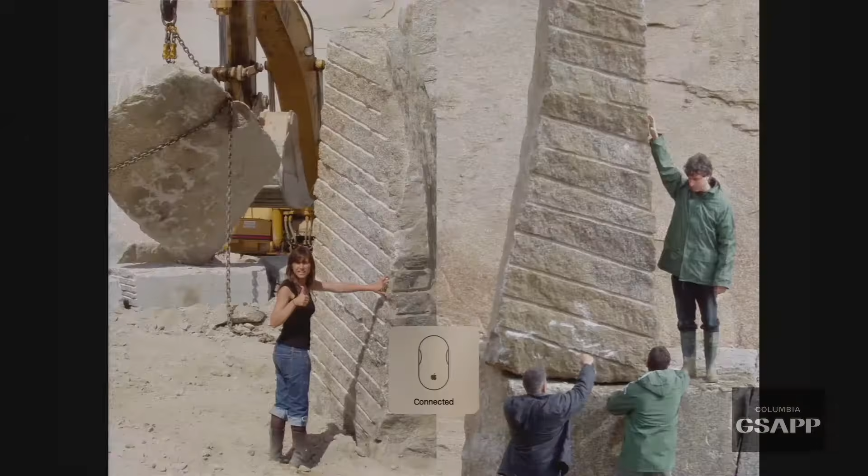Now that we know we've taken students out of their desks, we have to make it worth it, so we are under pressure here. Now, it's a real pleasure — Amale did an amazing introduction. Thank you very much, we almost want to use it maybe for a book, you describe us even better than we see ourselves. But yes, we are a group of architects.

We see ourselves with an engineering background and artistic vocation. Our work ranges across scales, technologies, programs, materialities, and geographies. We like the complexity and diversity that being an architect can involve, and we like engaging in new projects that we have never tackled before.

We started as local architects in Spain, working in some of its historic cities. So we learned how to work with history, how to interpret it, how to reimagine it, or be inspired creatively by history. And we became builders very early on in our practice, almost by necessity, because we realized that if we wanted to build some of the non-conventional ideas we had, we needed to develop the expertise and the tools, and take responsibility for changing some of the rules of the game.

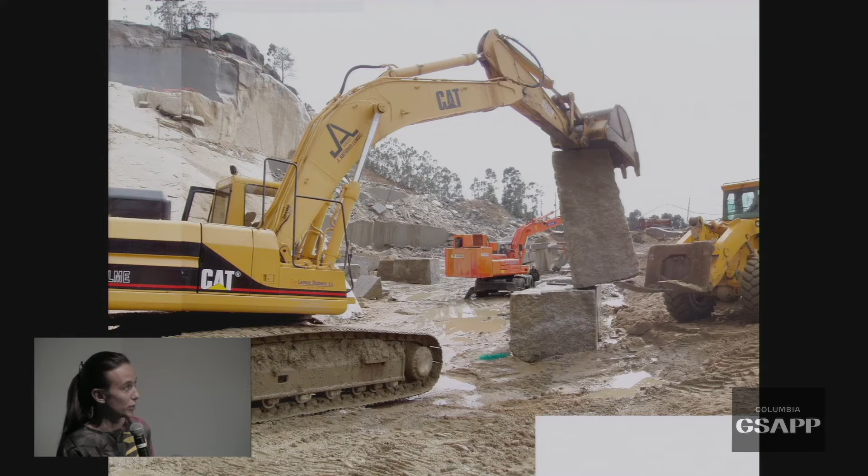But then we had to devise a plan to convince the owner of the quarry to let us use some of the space to do tests on the ground, to make sure that what we were imagining was really possible and made sense.

So these are some of the tests we were doing. First, we were just going to build part of the wall that we had designed.

I think this introduction shows our beginnings as designers. As you can see, this is not conventional design, but this was what we started to use as our primary method of understanding architecture.

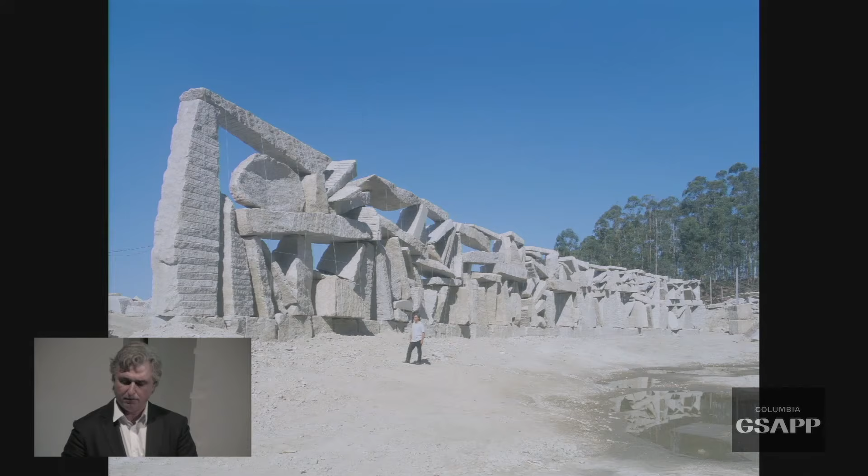Go deep into the roots of it, work with the systems, the processes, the tools, and be able to prototype it, almost fabricate it. And this includes doing it with landscape.

This was the full-scale model, or one-to-one model, the built structure that we did for Santiago de Compostela. We had to rebuild it again.

But this reaction, unearthing the substrate of architecture from its place, is something that has accompanied us since the beginning — understanding architecture as the conjunction of all these infrastructural, poetical, and technological links.

And we realized from these first works that the time that went into the idea of how to build this building and how to make this wall happen was a small fraction compared to all the time that involved really developing the expertise, learning about the material, and convincing the different agents in the process to make it happen, and to run the tests at the quarry to prove this was possible.

Here we learned the main essence of architecture: the weight, the masses, how to deal with gravity, all the tectonical encounters, how light reacts, all the forces and energies embedded into architecture. We also learned how these things could react with people in different conditions, and how this became part of the insertion of architecture into a culture or a city.

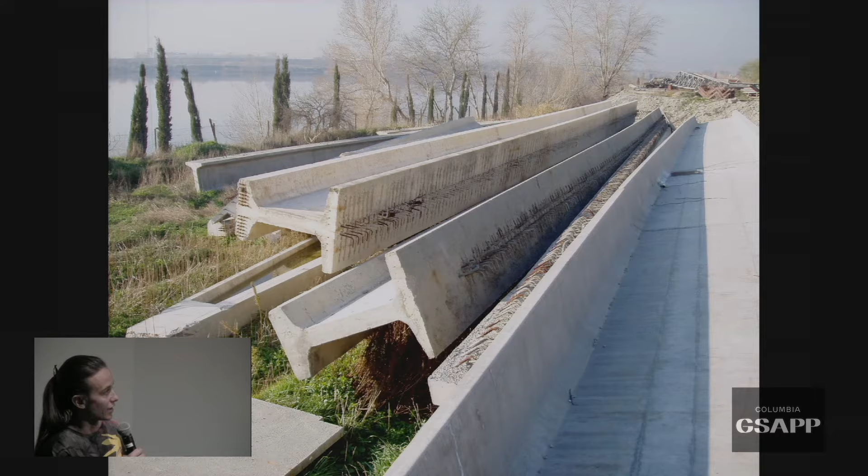After these first works, where we started building by necessity, we became builders by heart. We realized that the house has become our field of experimentation—a scale that has allowed us to investigate certain ideas about architecture that we can then take to other levels.

So the way we are going to structure this lecture is departing from three different houses that we have built, and how these ideas have been taken to other buildings or scales. We'll start with the Hemeroscopium House.

Even in a very industrialized process, there's a waste, there's a raw material, there are some primary elements that could be reinterpreted or reused.

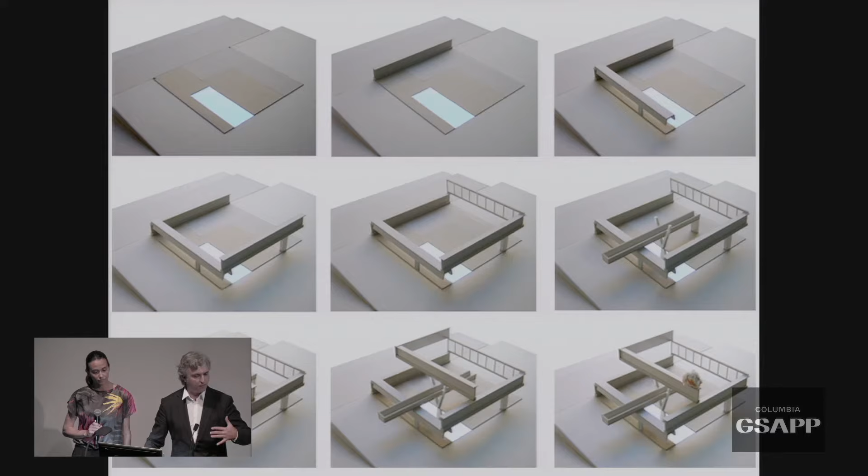Our approach to the pre-stressed concrete technology was a fascination with all these internal guts that contained the tensions that were going to be expressed and put into performance in a structure. Ultimately, they had a shape given by efficiency—a very synthetic, almost soulless form—that we thought could be perfectly put into an equilibrium system, and therefore create a narrative based on how it was built.

So all the strength of this house was understanding that the spaces were the consequence of the logic of how it was made, how it was engineered, how it was assembled, how it was transported.

All these helixes of transmission, of connections, of connectivity in that spiral, ended in that stone as the expression and culmination of that gravitatorial itinerary—also the expression of the architectonical and gravitatorial nature of the house.

All this was scripted to be almost automated through a clear logic of heavy lifting prefabrication. And this...

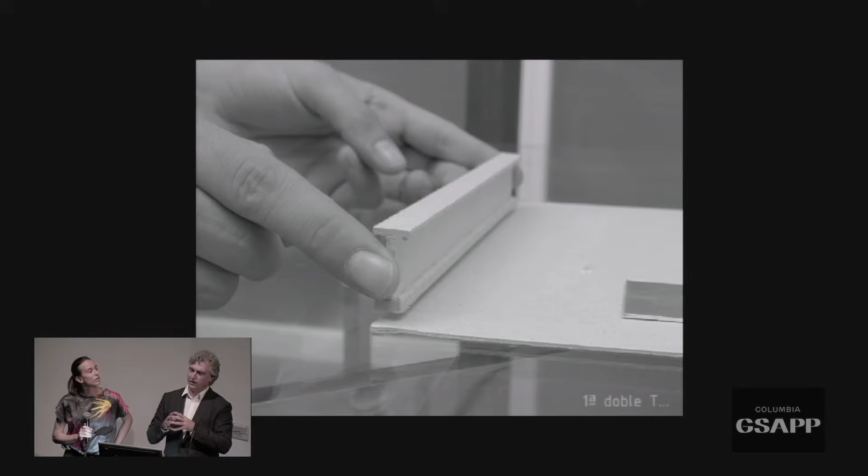This video expresses how our thoughts in the studio matched the way things were built—how some of the very abstract intellectual games we induce when designing have to somehow match the constructability of the project, giving it an inherent beauty in how it's built and constructed.

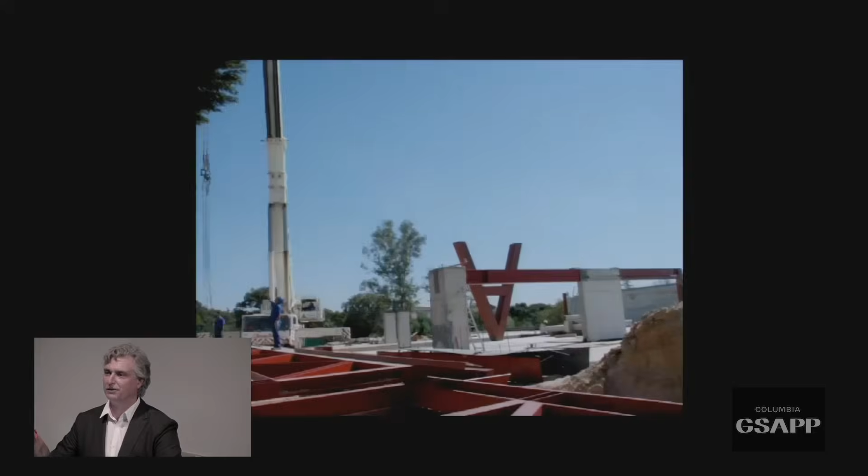Actually, we were the builders of this house. We were the contractors. I know this is unprecedented in the United States, but we built as builders, as general contractors, all our early works, and that gave us the knowledge and sensibility of understanding that the mysteries of architecture are related to its tectonics, its fabrication, its assembly processes.

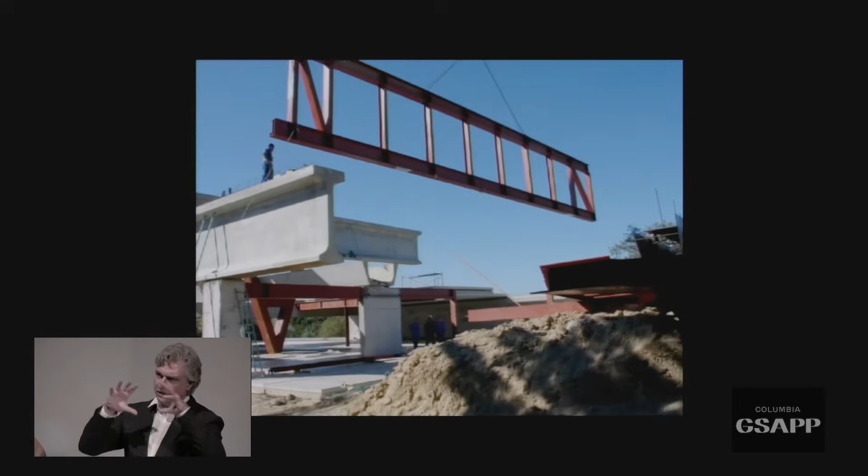I think this is something architecture is starting to lose, because our profession is being cut into disciplinary parcels that do not touch each other. And it's a pity, because we understand a holistic performance of the architect over all the stages of the process.

I think even being able to intercede as master builders in an old-fashioned way gives the architecture a completely different touch and interpretation that we are happy to maintain.

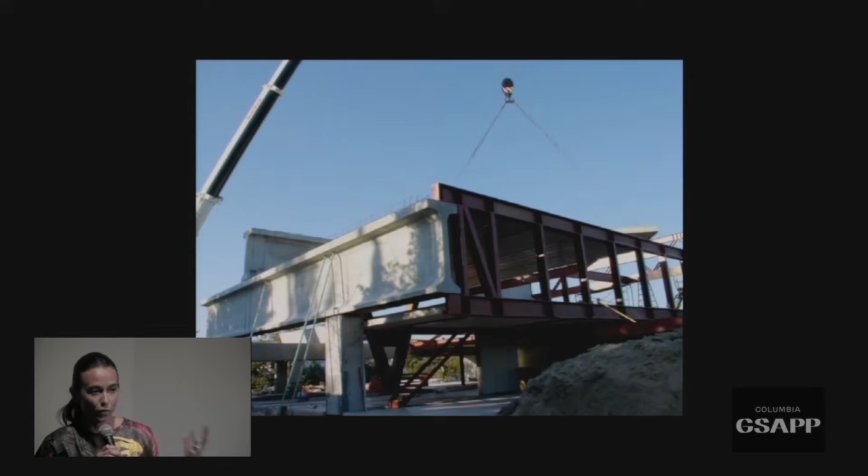I think this video also reflects well this parallel situation between the model and the construction—how we understand and use the model as a way of thinking, as a way of designing, versus a way of representing and maybe selling the work to others.

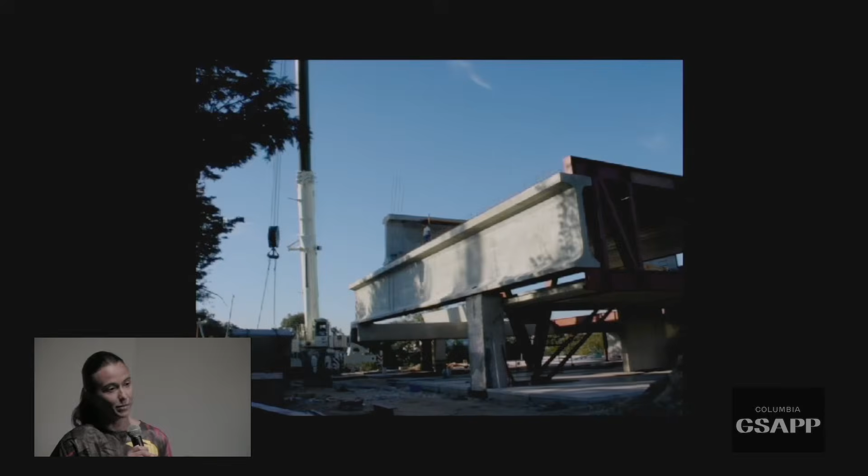For us it's very instrumental, because while we are designing, we are many times thinking using technologies already embedded in the design that we need to figure out how they are going to come together. So that part of the construction comes very early on in the process.

And by doing this nude expression of the structure, or revealing how a building has been made, we developed an architectonical language, or at least an interest, based on these almost similarities between all these previous moments of the structure being built, of the gravitas of the house.

So the house, when the structure is completed, already reveals the order of the space, the scale of the space, the nature of all the living areas that are going to happen. Then it's a question of adding the rest of the elements to make it thermally enclosed and to provide the functionality of the house.

So what we learned about this house was that we could achieve spatial goals of lightness, transparency, continuity, how to relate with the horizon and the surrounding, even with a very synthesized, almost artificial system of beams, things that are unrelated to the environment. These pieces are all designed according to their mechanical efficiency.

But this reinterpretation gave us some clues about the spatiality associated with how to put this in a particular balance, how to excite the gravitational actions by tracing all those limits in an open way. As you can see, all these reactions from the vibrant line of the landscape clash against the linearity of those architectonic traces.

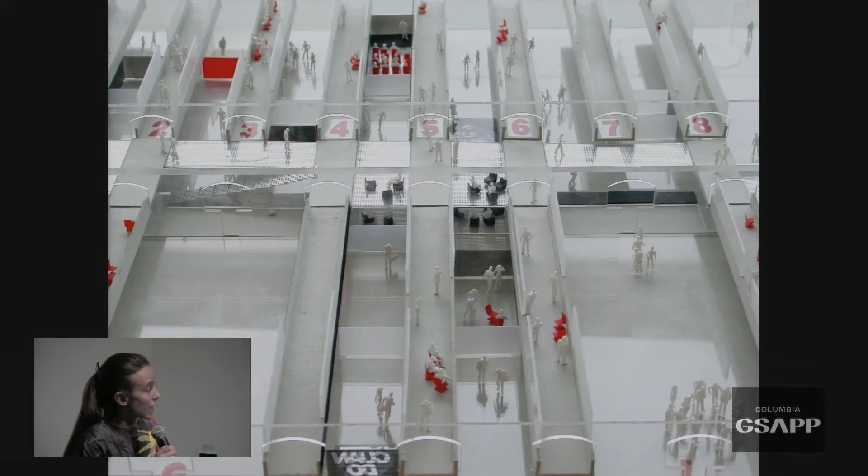We tried to bring this to a very sensible context, protected buildings, beautiful engineered buildings from the beginning of the 20th century, and figure out how to insert a new structure that would dance with the old structure and create another space, while allowing both times to be legible at the same time. That idea led us to propose the insertion of these bridges of activities, answering the competition's question of how to create a second level in the warehouses, while enabling the old and the new to live together and distinguish themselves.

So all the challenge in this building was to insert those beams through the eyes of the building. Again, a technological challenge that became the performance and the soul of the new space, by almost invading slightly. This is also a code issue. We convinced the authorities that this was not part of the building, so we inserted it naturally through the windows, and got a second level.

So this is the kind of fascination that technology offers an architect, the way of threading through technology some of the main aspects of a building—like, do not insert 25-meter beams through a window. In this case, this was the way the building ultimately existed.

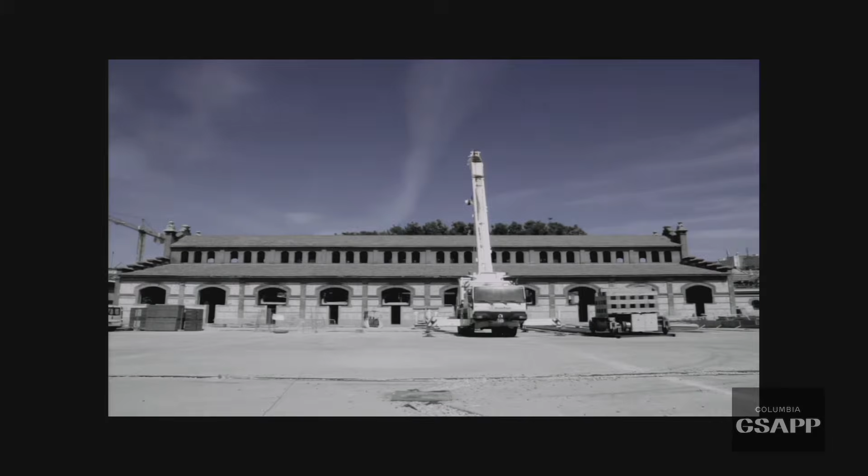And actually what seems very smooth and easy was the part that obviously took the most time to figure out, design, engineer, and orchestrate—especially because everybody was thinking about precast concrete and big beams introduced through the windows, and they were anticipating some kind of catastrophe.

But you can see how the insertion of these elements into the space, like we saw in the Hemeroscopium house, because of their span and the way they are supported on the windows without really revealing clearly how they are supported, they are very heavy but seem quite light in the space.

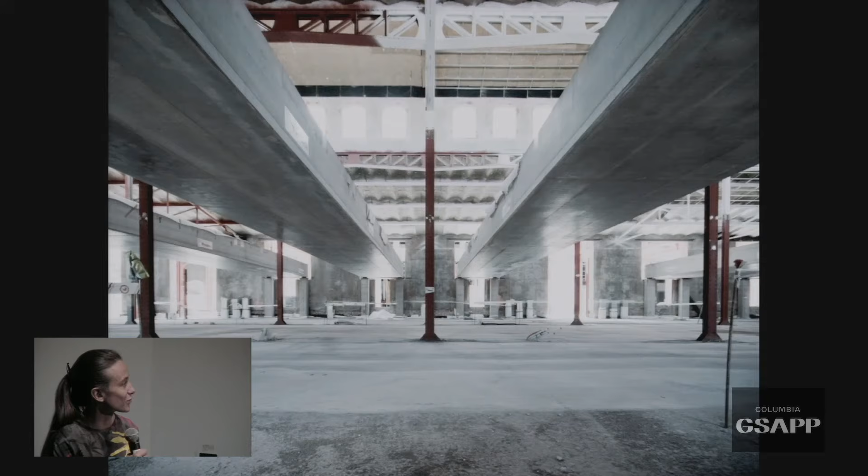So all this effort, these challenges to the logic of the building and the logic of construction, ultimately serve a goal, and the goal is very architectonic: the cohabitation and the friction between these two structures, this kind of dissonance, the fragility of that thin column with the presence of this lintel, or the horizontal order of the basilical organization of that warehouse with the transversal connection of these bridges.

I think these encounters, these dissonances, these intromissions of structure into another structure were the argument of this building, and ultimately the beauty of the space.

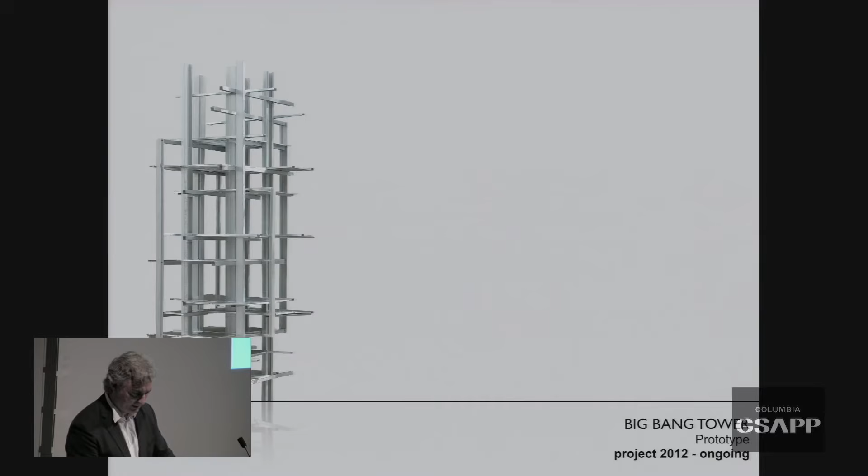This continues on and on, and we've been pursuing the idea of these systems of construction to build at greater scales, from a house to the transformation of a historical building to a high-rise. We believe this has enormous potential that we're designing, first intellectually and conceptually, and ultimately searching for the built opportunity that culminates this itinerary.

This building, what we presented in Chicago, is called the Big Bang. It's a challenge to the American tower, the tower as a core and shell system. What we presented here is the explosion, what we call the Big Bang, the explosion of the gravitas of the core.

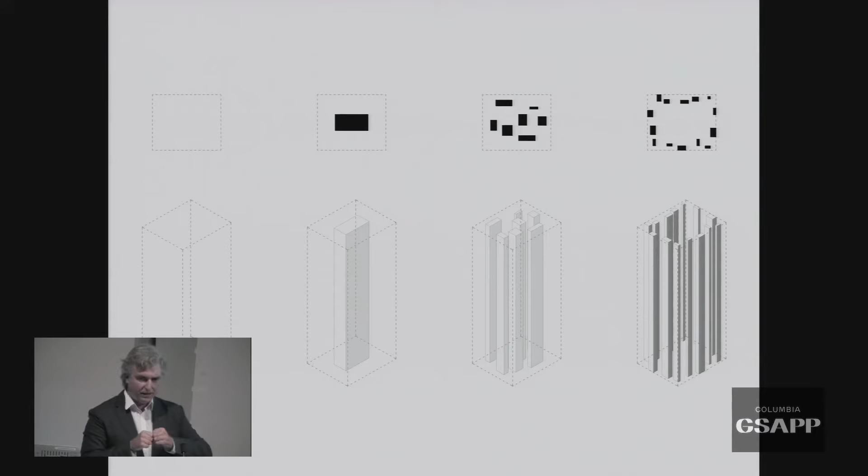The core is where all the mass is concentrated to liberate the envelope. This is the classical modern tower. We understood this in a contemporary way, attending to the logic of fabrication offsite, so this could be eccentric to the geometry of the center and adopt several forms through this kind of expansion of all the pieces.

So this is the standard core in any tower, and these are different variants of the same mass dispersed more efficiently, creating a new spatial condition.

This is what we wanted to explore in the Chicago Tribune tower, as the culmination of a research project that has come through Ensemble Studio, back and forth in different projects that are yet unbuilt. By exploring this core, we're eliminating the rest of the structures and transportation systems—all the infrastructure becomes the structure of the buildings.

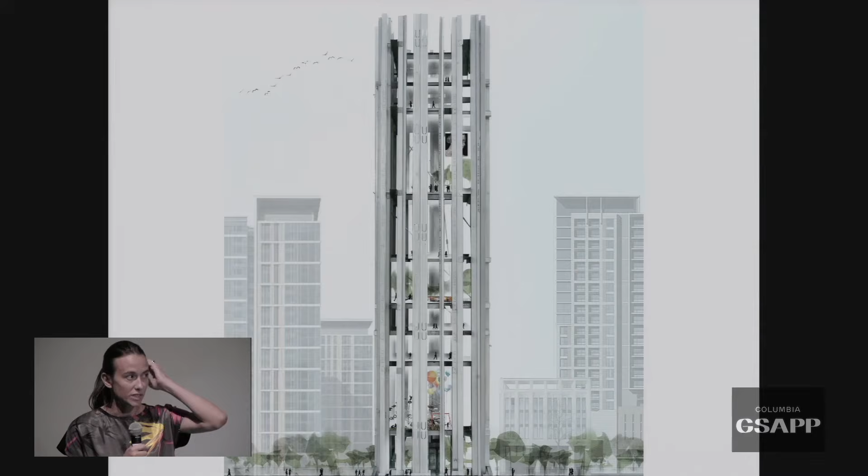Accessibility into the different levels is multiplied, and the different levels we're creating can have an urban scale that allows for different uses, different programs, and different architectures to happen inside.

So the tower suddenly takes on a more urban scale, and instead of being a massive, completely introverted and indifferent object, the city can start invading the tower programmatically.

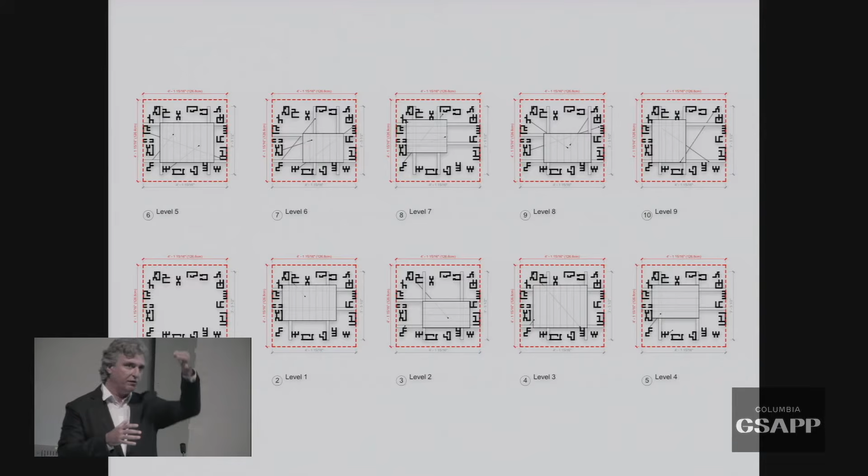As you can see, all these pieces that congregate the vertical movement of not only mechanics and forces but also people, MEPs, etc., are distributed within the perimeter in a static ring that is permeable but structural.

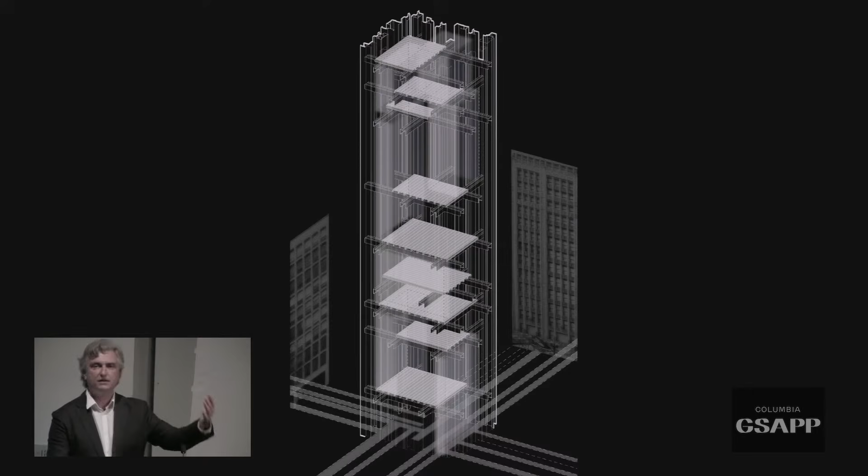This is what gave all these different platforms a completely different spatial condition, a certain urbanity, an extension from the ground level, and the possibility of being freed from the core and the perimetral shell.

This is what we envisioned for the new American tower in the competition that Chicago celebrated in the early 20s, and now the Biennale re-celebrates as a challenge for different architects to think about the tower as a typology.

Sometimes when we show these projects we get the question: why are you so in love with concrete? Now you'll see that yes, we are in love with concrete, but not only concrete.

While doing this research, we were also interested in the very opposite. Because while working with very heavy elements, we also discovered the good things about them, and also the limitations.

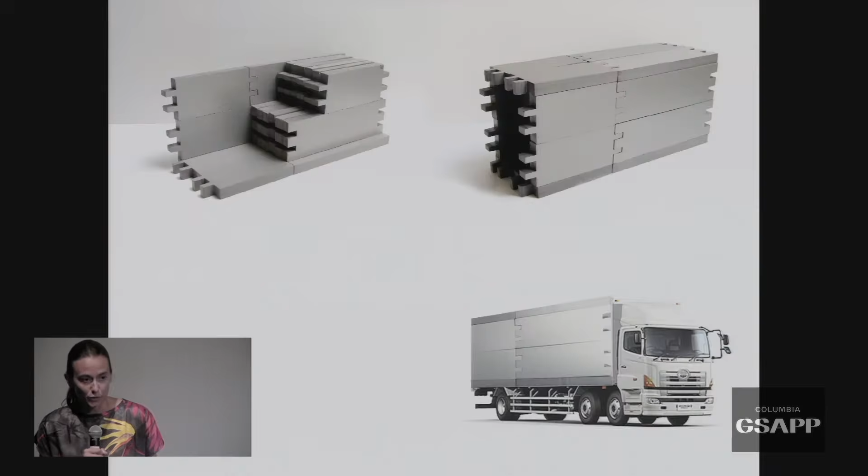So we had the chance to approach very lightweight materials when thinking about emergency housing for Japan some years ago, when the tsunami happened. We were reusing some of the EPS foam industry that was directed to build fish boxes to preserve fish.

So we were reusing them into a system that would allow people to build their own home, using just four people in a week—they were able to build their home without any other auxiliary method.

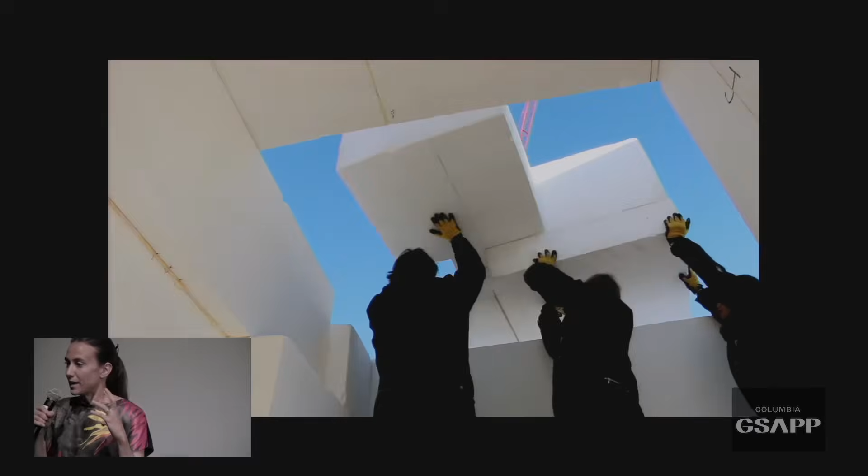From there the research evolved, and this is now at MIT. We were doing a workshop with students building a very essential unit called the Cubic Igloo, which is this very massive foam structure where foam performs as enclosure, as structure, as everything, with no other additional material giving reinforcement.

Of course, this all works in compression, so it was almost like building a super big model that is actually the building. We were very much in love with this material for some time because it's so easy and so light, and we were able to build a structure even without scaffolding—we discovered that in the US you need a license to have scaffolding.

So, and then we could move it. So now we are actually thinking where we are going to move it, and it might become a very nice hut in the mountains or who knows what, no?

But we discovered the opportunities of lightness. Of course, foam has many other not so good aspects, like fire or working with tension. So then we started hybridizing the material with other materials that would give it structural reinforcement, resistance to fire, and also learning from the reinforced concrete that we have used. We were applying some of the logics to develop these very ultralight systems. Here now, not anymore a structure in compression, but adding some tension and building a beam.

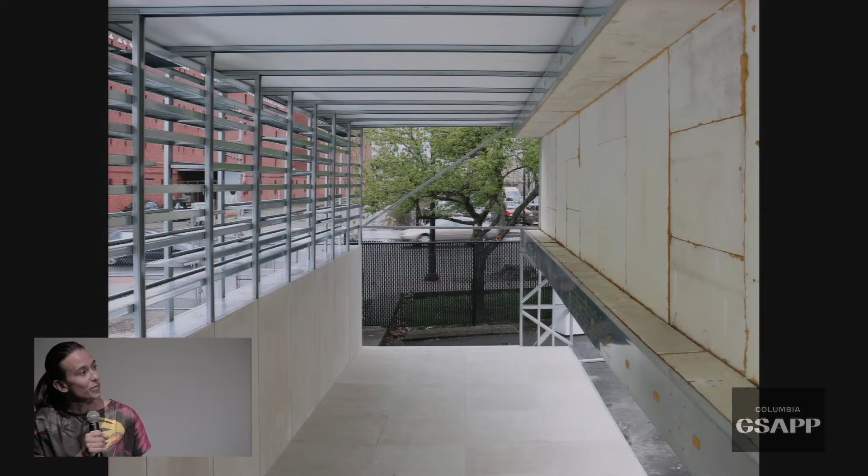So what this research in the lab represented was our interest in detaching two things that architecture has always put together: mass and weight. We understood that we could build enormous, strong and lightweight structures without having all the burden of the mass. And therefore, we could apply this to different parts, like a 50-foot beam that we put in tension, a wall, a slab, a roof.

And this was what inspired us to enrich this research in a real building, in a real place, in Brookline, Massachusetts. By the way, it's our house and office in the United States.

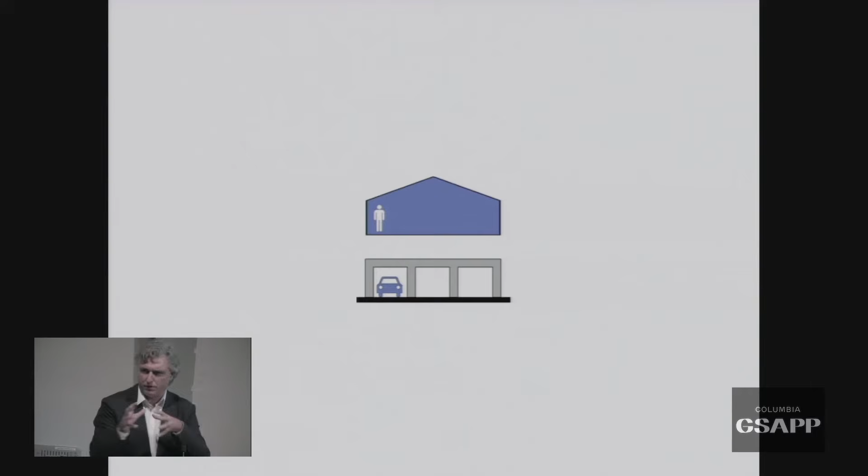So immediately what we did was to spin off all the research that we had done in the lab that we shared with you. It was still raw, it was not ready to code, it was not ready to market, no? So we had to push it a little bit further and understand that that was going to be part of a pre-manufactured piece that, by the way, we decided for several reasons that we were going to build in Madrid, Spain. The principal reason was that we could do it for 1/10 of the price and much better, okay?

And also we didn't have to deal with a Massachusetts contractor, okay? But that's another story.

The fact is that we wanted to demonstrate the potential of off-site maritime prefabrication construction. As you know, all off-site generally is a local tradition that goes from A to B by truck. When you have to put this into a boat, it's a completely different set of rules. You have dimensional and weight limitations, but it opened a new way of understanding off-site construction.

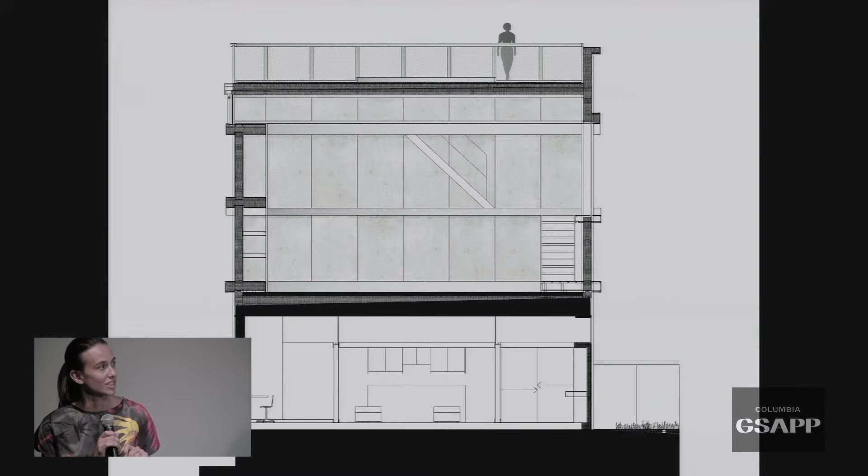So we decided to go through with it. We designed the plan. It's basically a loft, a room that has 4 walls. And actually, we were fortunate that the dimension of the house is 30 by 40, yeah, and the length of the maritime container is 40.

So we dimensioned all these pieces according to these limitations and requirements of the transportation, like any off-site construction limit. And there was an added limit: we didn't want to reinforce any of the existing foundations, which we audited a little bit, and they were not bad, much better than any timber-framed building of any neighbor, because this was a commercial industrial building.

But still, we didn't want to add a lot of weight into those linear walls. Also, because we had been living in the lower structure for almost 2 years, we had redone all the house to fit the family needs. So the only thing that we were missing was a big space, a big family room, almost like a multi-purpose domestic space where we could have friends come, where we could have an office meeting, or where we could watch a movie. And that's actually what we designed, one big room on top.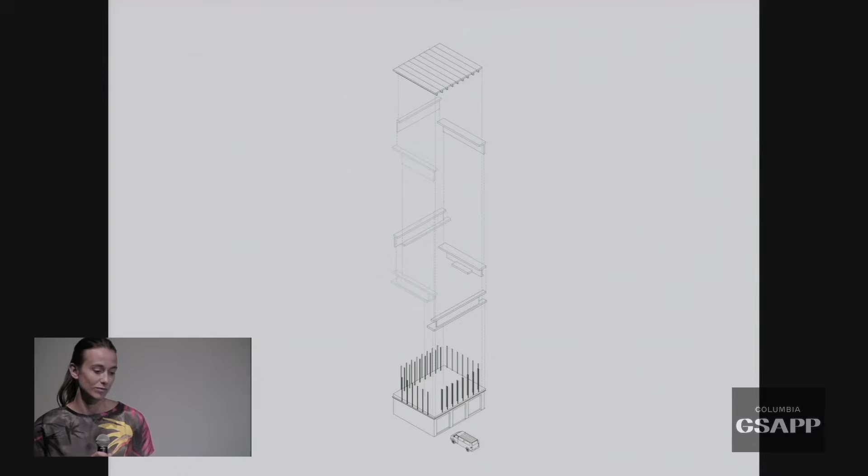So what you've seen here is the expansion of what we have done in all our career previously, is the design of all these carefully customized pieces. Don't associate any prefabrication to a standard thing.

This is the old school association. I think the biggest way of customization is through an industrial process. So each of these pieces were individual and customized. One contained the bathroom, the other one the kitchen, the other one the closets, and every single one of those pieces had an individuality.

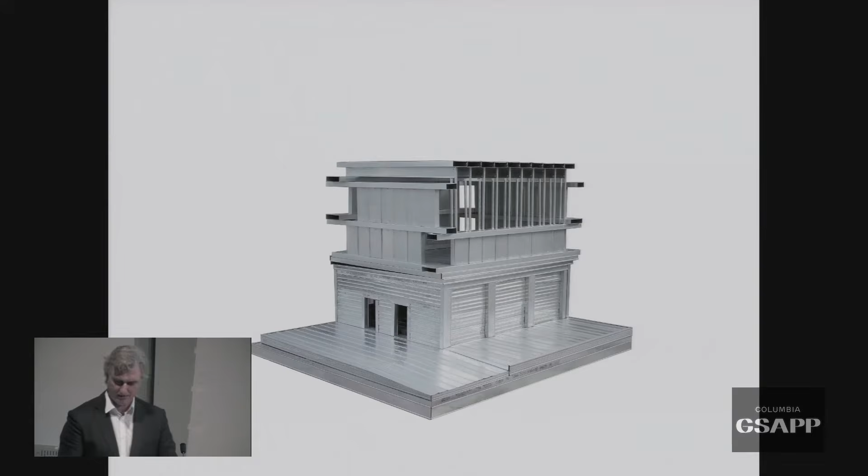The computer is failing all the time, and it's strange because it's a Mac, and Mac does not fail. So anyway, the logic was to do all these assemblies with the added difficulty that all these pieces were coming in a logistic of maritime transportation with all these containers in a given neighborhood. This is the problem, and architecture had to solve it.

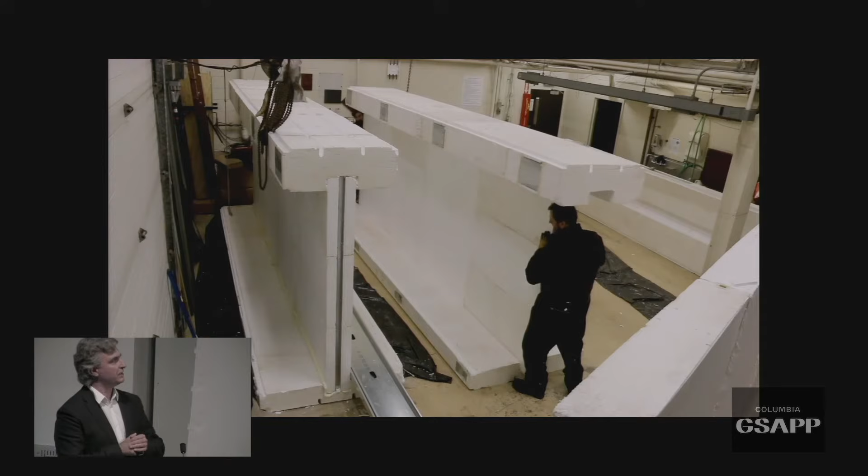So we did a workshop with students like you that started first in MIT and after in Madrid in our shop. So all this was done by non-skilled architects - architects that were students and recent graduates that were interested in making, in building, as the way of approach design.

As you see, everything started, as I said before, in this research, exploring the lightness, exploring the potential of this technology. And after, in an Ensamble Fabrica, our shop, we started manufacturing it. And here we are evolving the technology.

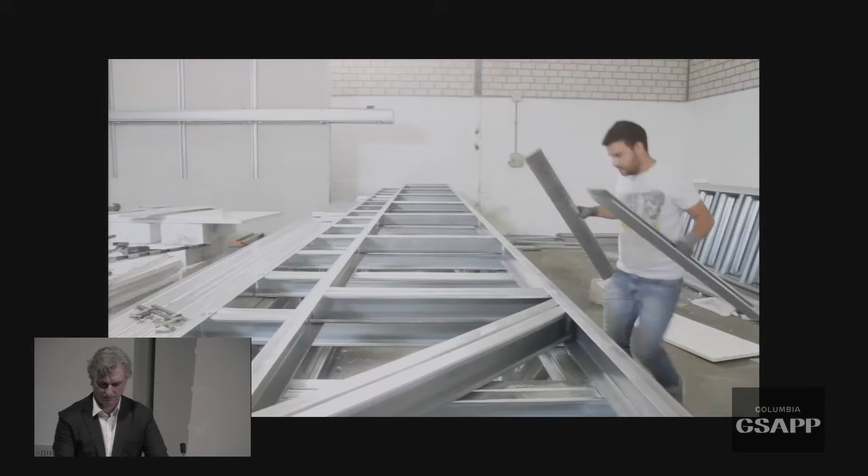We are adapting it to code. We are reinforcing it more than it structurally needs for safety and for fire. So it's already something different to what we had been doing in the lab, but we are doing these prefabricated elements that in the Hemeroscopium house they had to be built in a factory and trucked and assembled by huge cranes.

Here we are doing it with our hands, with really low-tech techniques, very easy tools, and then we are craning it with a much smaller crane afterwards.

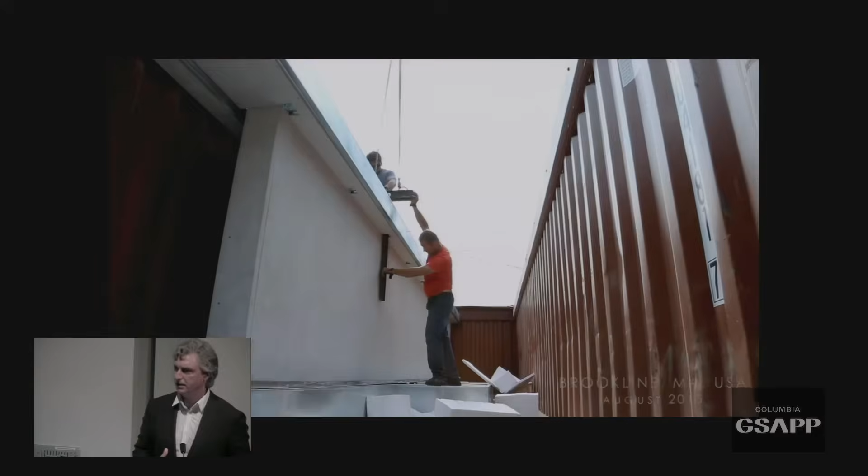What we did here was fusioning two traditions, two constructive traditions. The North American is based in framing - you guys frame buildings, okay? In Europe, we don't frame buildings, we do something else: walls and columns and beams. But here, the framing is also associated to thinness and light. We wanted this framing with a thick corporality, with a certain body, and with weight without the mass. This would be the principle.

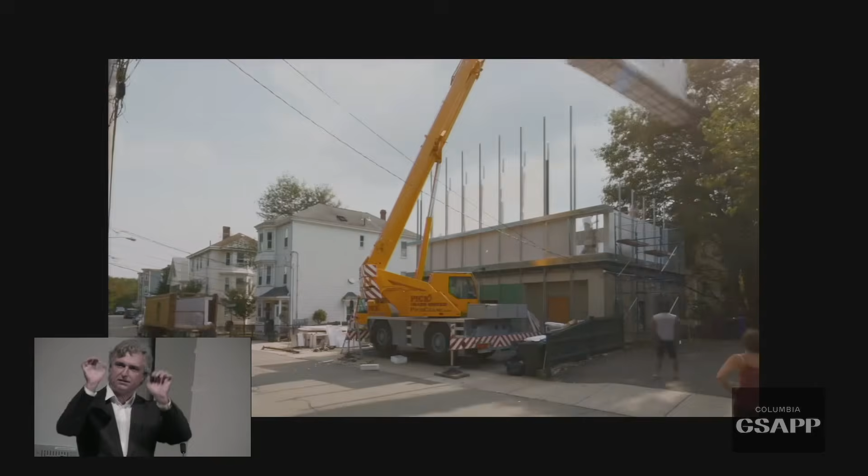So what did prefabrication mean here for us? It was being able to do it ourselves, but it's formable then, because all of these materials are, although they are prefabricated, they come to the site, and if there's any problem, they can be modified.

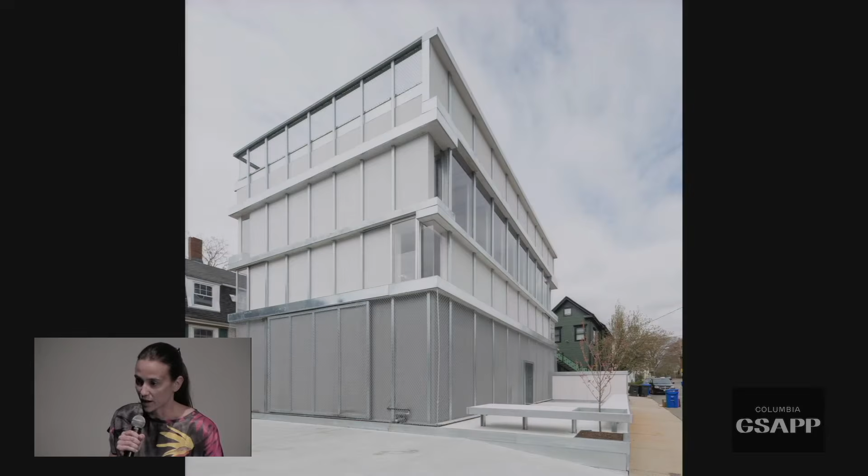And then it was, really thinking, we are resolving our own house, but how can we take this to collective housing, and how can we apply what we are experimenting and testing on our own skin and bodies? How can we take it and use all the knowledge that we have acquired during this experiment?

Now try to convince the different agents that need to make this happen at a different scale. And we have realized that having built an example changes completely the way that you can approach somebody with a new idea.

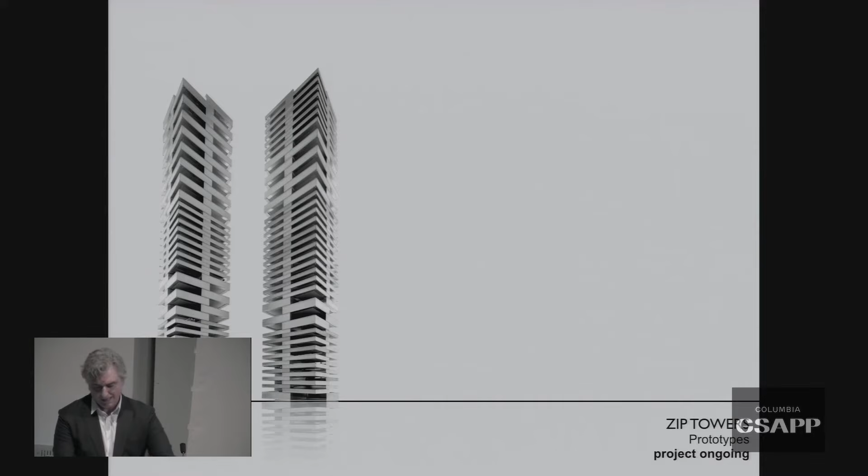So we had the chance that a developer, now a friend and by the way, a Cooper Union architect, approached us and asked us if we were interested in real estate. And we said yes, even though we've never built an apartment. But we think that all this logic could be turned into high-rises, into different, let's say, real estate needs.

So we have been since working in trying to extend to this high-rise, all this logic of prefabrication, of hybrid structures, of lightness in origin and concrete injection in destiny, ultimately to provide a new spatial condition to the high-rise multi-purpose tower. Conceptually, we're not designing the apartment.

We're just giving the frame, the structure, the views, and the performance. And any user that buys these frames that have been dimensioned according to certain code and market requirements will fill them with any layout that they are comfortable with, like any of these lives, aesthetics, dimensions, and multiple architects that could do all of these different layers of the structure.

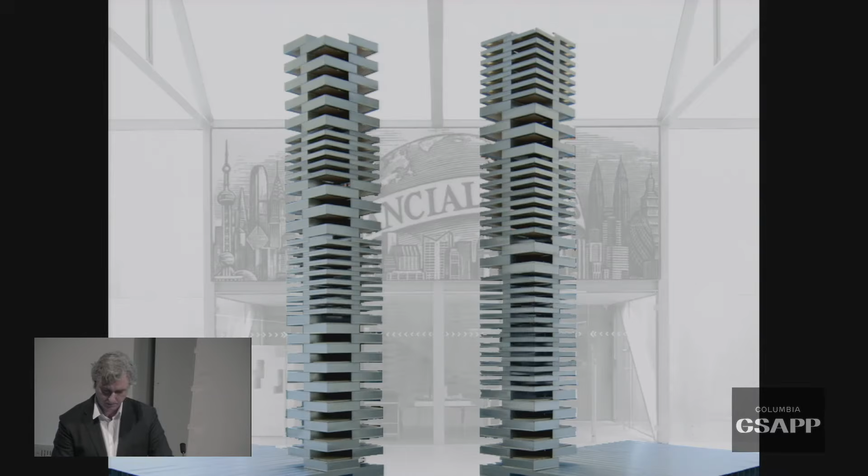So in the Hemeroscopium house, for example, it's quite radical in some of the constructive aspects. The layout of the house is more conventional. There are rooms assigned to specific functions that only happen once at a time, except for the courtyard that gathers them all.

In the Cyclopean house that we showed in Brookline, there's this just one big thing that serves all purposes, and we use it all day round. We use it to work, we use it to sleep, we use it to play, we use it for everything. We realize that also now with new generations, there is not this traditional family with three kids that have this need of a very conventional layout.

And also, with our own experience, we try to apply this flexibility in the house, providing the infrastructure associated with the structure, and then really being able to allow the home to grow over time. So this zip tower has no height, has no form, has just the vibration of these double and single structural frames that follows the rules of the market. So this is a developer dream, that ultimately you stack during the growth of the project according to the needs of the market.

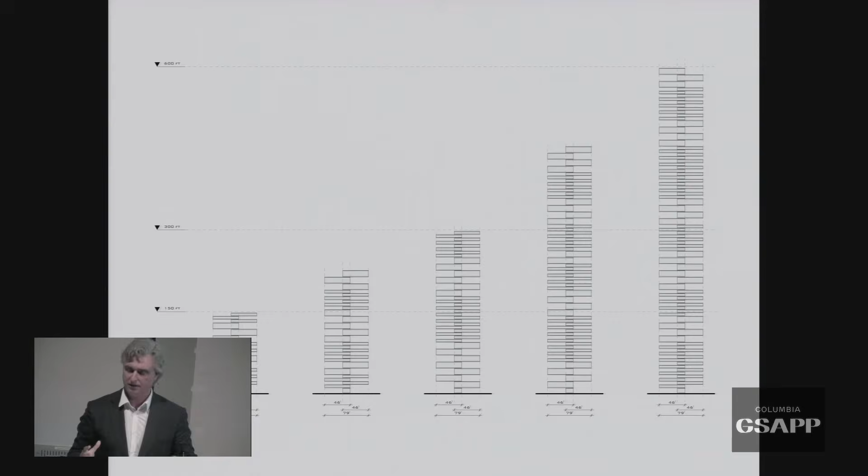So this is something that we've also made several variances over the same idea, with different ways of stacking these frames, always with the same idea that the perimeter has to be freed for the vistas, for the air, for the light, and also all the structure has to concentrate in a cross, so all these quadrants are free to develop with new layouts.

This has become - it started as a research project, now we are spinning it off into more than research, even though it's not yet built, but we are already testing some of the prototypes.

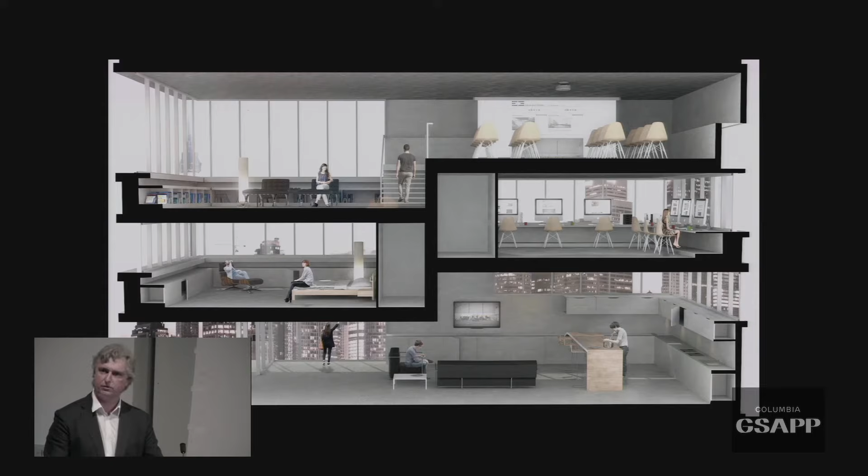So our practice, and this is maybe the message, started being very focused in the way things were made, trying to develop the tools, the attitude towards architecture and the engineering required to extend all this from a conceptual idea into something that has to be immediately put into a building.

And again, in these projects, let's say the architectural elements are divided into the scale of the domestic that allows for this prefabrication on site using, again, lightweight systems that makes transportation and assembly easier to then be hybridized with concrete and stabilized on the site.

So in these prototypes, we are merging now the different technologies of the lightweight construction and the concrete on the site. So now we're going to end with a completely different story that might be antagonistic, contradictory of what we said so far, but it's part of us.

And we've done it always in parallel, and we're working on how to make convergences between what is coming from a raw, natural environment to something that is fully industrialized, automated, designed to be mass-produced and systemic, okay?

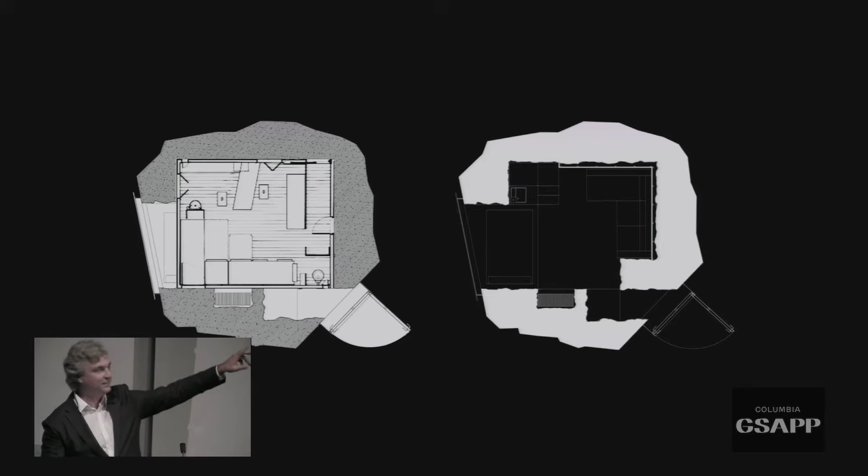And we wanted to build with nature. Our cabanon of beton used the scale of the cabanon just to make a thick crust of nature surrounding the dimension and the scale of a little hut. We called it the Truffle because it's a parasite of nature.

It starts with a hole in the ground that receives a ready-made, almost system of hay bales stacked accordingly, and everything is refilled in between those interstices between these two natural conditions and unearthed. Not yet being architecture, this is ready to be transformed into architecture by actions of a cow carving and inhabiting it, and growing, or actions of transforming it into something habitable and comfortable. I want to show you this video that again tells the story that is behind this project.

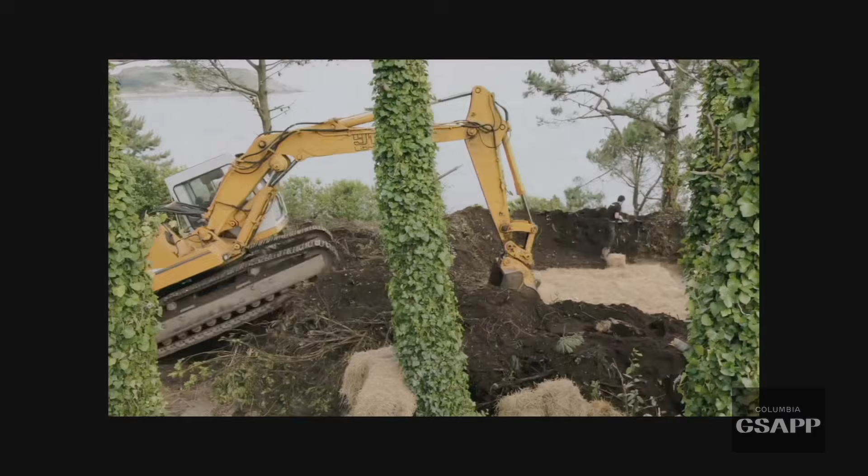As other projects, it starts with a workshop - a couple of young architects and students and ourselves making. And while all the other projects, or most of the other projects, were about precision, about making those beams fit into the windows without error, this is very much about uncertainty sometimes, and about flexible boundaries. So the idea is, the architecture has to do with reusing and using some of the resources that are around, about creating a certain space, but not really about the final detail or dimension of things.

What we learned by doing this was that all these materials put together the wrong way, giving all the actions to the contamination, the encounter, the referrals of all these matters that were just by the side, we discovered something that could be close to an architectonical language, where those boundaries were blurred between what is architecture, what is nature.

And also, we learned from the concrete being capable of expressing a lot of different matter conditions, from a viscous print of those hay bales to the liquid, almost continuum of the lintel that resembles the petrified sea that it's facing, to the exterior earth that is almost printed into the thickness of the wall.

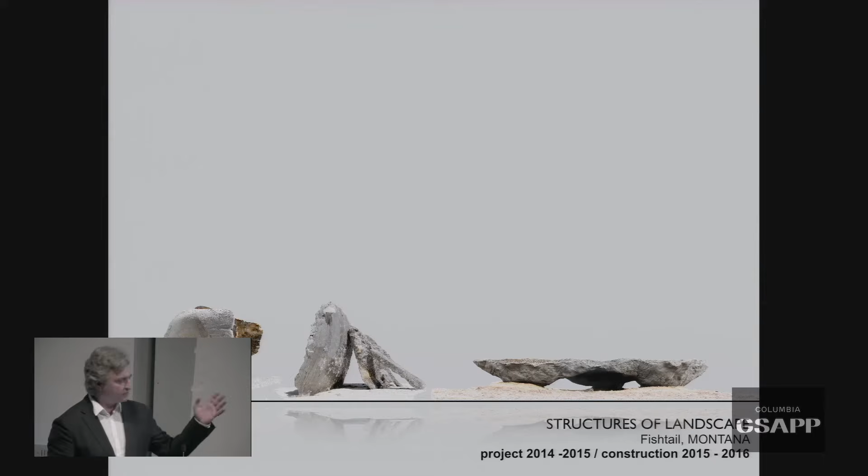It's done in Fishtail in Montana, in the soul of the western of North America, a place that is full of history, even though it's completely uninhabited, wild nature, and undeveloped, completely undeveloped. We were called to do an art center.

Our position was not to do an art center like a building, but to exploit all those pieces that compose an art center scattered within the landscape, each having their own position and creating a kind of constellation among each other.

So Cathy and Peter, when they approached us to talk about this landscape and about their vision of an art center, this ranch is about 11,000 acres of land, so it's really a vast extension.

And their main ambition was to be able to build an art center that would be in total harmony with nature, where music takes a big part. So the architecture had to be able to live in this landscape without creating an obstacle in it, and had to allow the music activity to take place and to, in a way, bring the users and the visitors in contact with nature through the music.

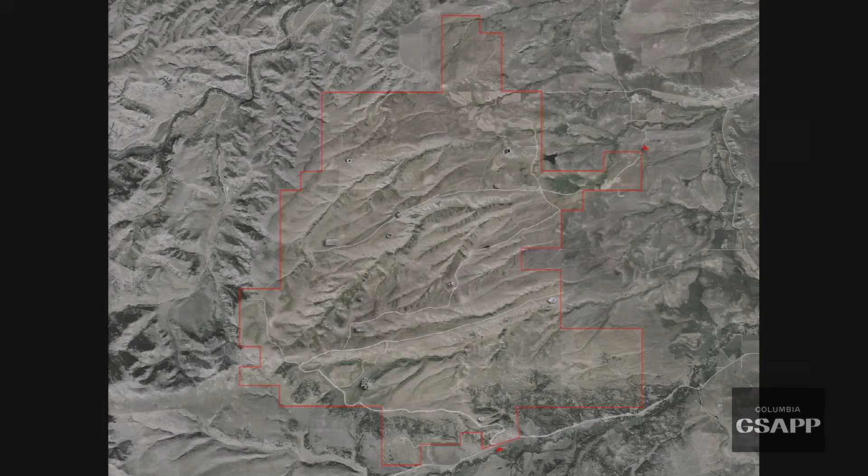We shared all this research with Peter and Kathy, and we did this master plan where all the different pieces were related as this constellation that printed the relations on the map of the ranch, and disseminated all the different programmatic spaces among it.

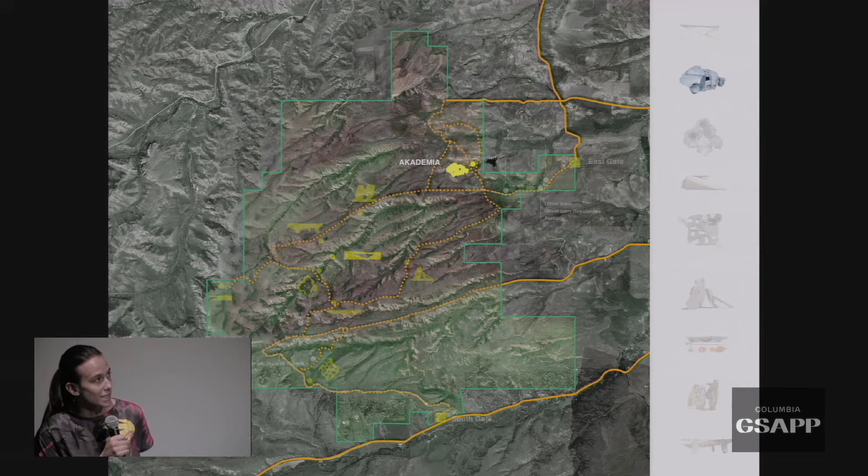So each of these architectures have their own intimate connection with the landscape. They are very much spread, and they are each able to exist without any activity, so they don't look like empty buildings, and this was something very important because it's a very remote place, but they are able to serve as shelters for the visitors, as landmarks in the place.

The first one, the Akademia, is an explosion. We wanted to celebrate the transformation of energy into space. We know that this has been explored through physics, through art, through poetry, but we wanted to celebrate this as our first action to connect with the soul of the place.

By the way, under that geological area is one of the biggest bubbles of lava and one of the most active volcanic areas of North America. So we wanted to depart from this.

So we did some experiments still in models, where we built a chunk of mass, and we inserted in the center of mass an energy source, in this case a little firecracker. We wanted to see that that energy was transformed into space and make this event, this performance, this very, very pure architectonical primary moment, the project.

These are techniques that are not usually for building buildings, but for demolishing them, and they are very much used in the quarry, where we're showing the first images, to very precisely cut big masses of rock out of the mountain. We learned how to do this when we were in the quarry in Santiago, extracting the masses to work with. The client loved the idea, but he doesn't know how to make the insurance work.

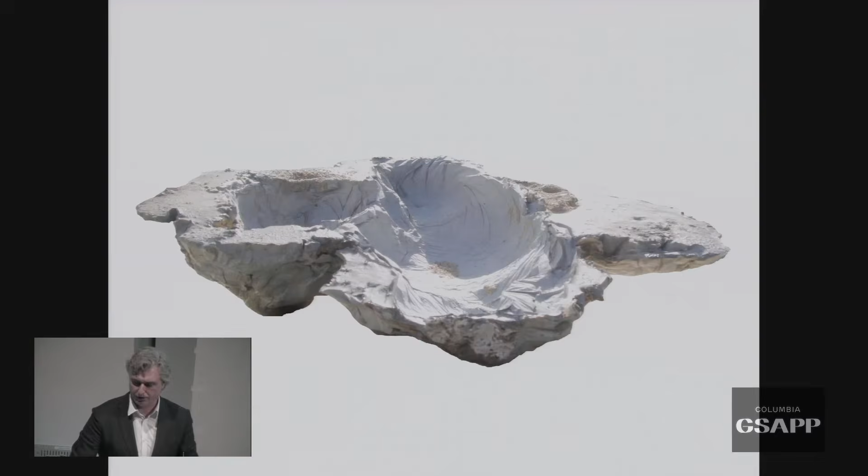This was a fontana. Fontana are natural reservoirs where all the water condenses, and where the animals go to drink. So we wanted to pump all that into a vase, where not only animals but visitors could take a drink and a refreshment. We wanted a fontana that could leak, that could be exuberant and baroque, like the fountains we've all admired in Rome, but with the particularity that by losing its balance, it transformed the vase into an unstable cascade that threw all the water back to the reservoir and pumped again. So we wanted to play with the hydraulics and gravity of water through this unstable vase that was born conceptually as the reaction of weight through the hydrostatic pressure displacing the concrete.

And that's the way we would have built, or will build, the fontana in the future. Each of these pieces is different in its process of construction, its form, and its conception. They are actually amplifying some elements of the landscape. So wherever there is a reservoir of water, these architectures help make it available for visitors. Some shelters are providing shade where there is absolutely none. There's a bridge, which you'll see after, that connects disconnected parts of the landscape. So in a way, they are adding, with very little action, some valuable spaces in the ranch.

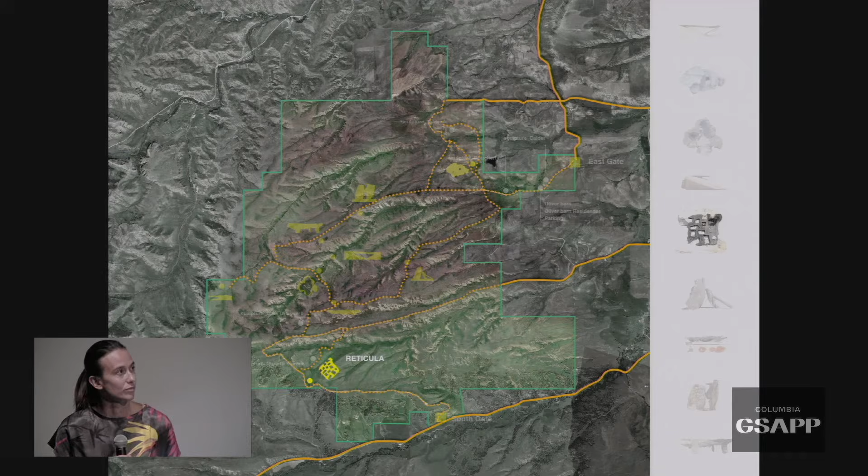Another structure was a reticula — the reticula as a grid when it becomes part of something that has no Cartesian order. This was something that we explored, and it became part of a bigger scale that is being developed.

And another structure would be a ponte. El ponte was a piece of infrastructure that had to jump through a canyon. So we understood that standard technology for constructing bridges, the ones that use the earth as mold, could be interpreted with this approach to architecture and infrastructure that we were using. So again we did the model according to this technology, as it would have been used in the real fabrication, using a steep oblique plane to cast it against the earth, and of course reinforced it accordingly.

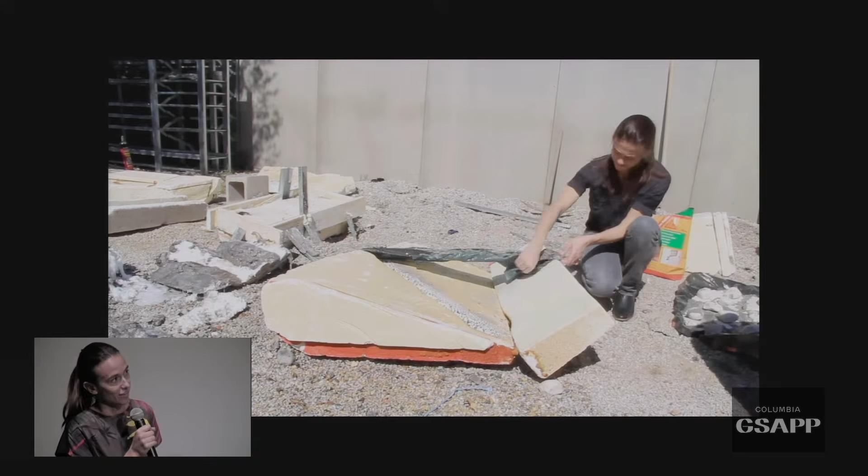So these videos we're showing are actually the very early moment of conception, but already we are testing ways in which they could be built. Sometimes when we really arrive at defining these elements, the process changes, but we are already trying to think how they are built with the land.

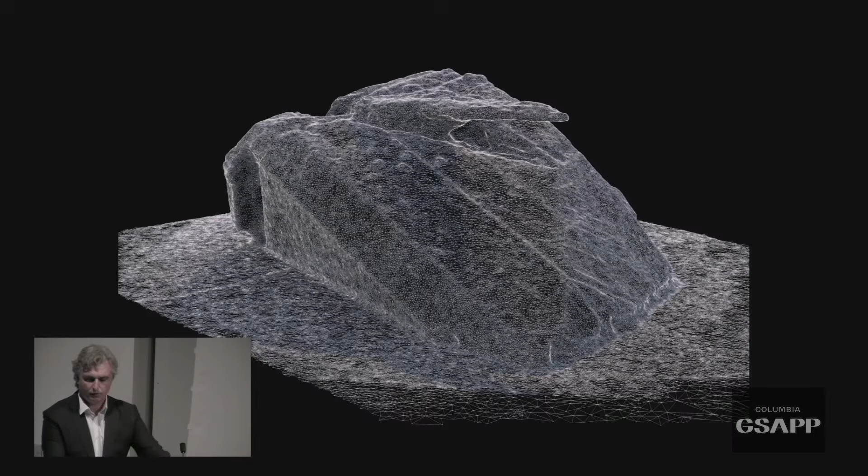Conceptually, we wanted this to be like a dead trunk of a tree, petrified into the landscape and part of it — like this rostra. Rostra is just kind of a tongue looking out at the landscape, a cantilevered mirador thrown through a beautiful canyon called the Midnight Canyon.

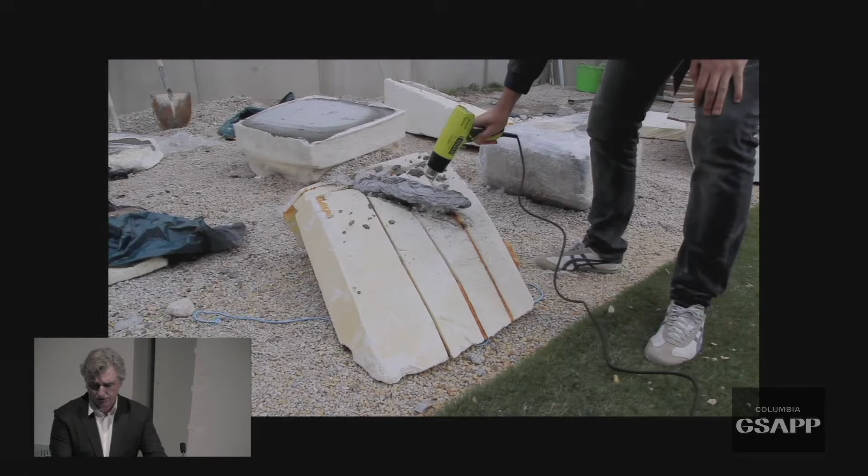So anyway, all these pieces have the particularity of using a connection within the conceptual, the projectual, and the constructive modes. We wanted to be as pure as we could in transposing part of the artistic approach to the craft of the model into the construction. And each of these singular structures all share the common ground of being, let's say, petrified, magmatic, non-geometrical abstractions of a clear structure.

Before we show you the built ones, I want to show you the ones that we're working on right now. It's La Tabula Acustica. This is a bigger venue. We want this to be like a Greek temple — a silent, almost archaeological part of the landscape that inhabits it with its own presence, but it's not yet a building, it's not a temple. It's kind of an ancestral presence that could still be used from time to time. This was the kind of program we wanted. We didn't want an auditorium with enclosure and air conditioning. We wanted a place where acoustically the sound would profoundly react to the place, and also be able to be part of that landscape when we're not using it.

While the projects that we have built are related to the things that we have in the landscape, the portals, the hills, in this case what we wanted was to bring the mountains facing the horizon into the place spatially, conceptually, and almost emotionally, as a music venue.

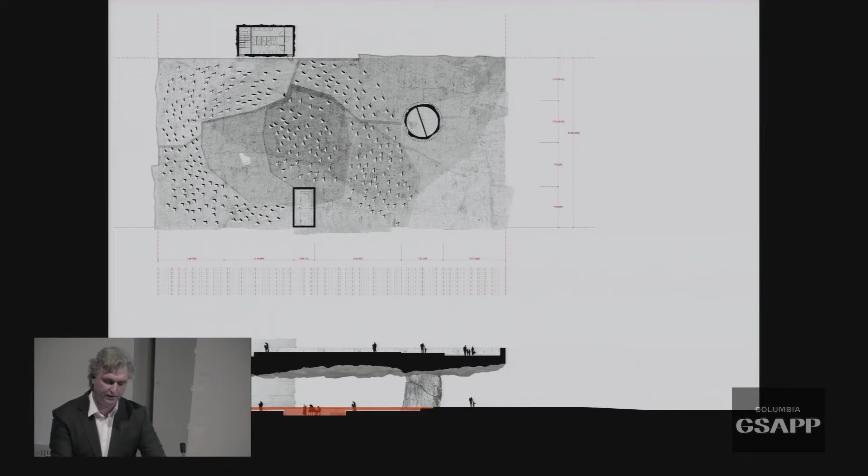So what we did was clear up the bedrock in the ground, facing those shales of bedrock in a natural first scratch of the earth, and locate a lintel that had the property of

rebounding acoustically the music into the space. So the way we are thinking it will be built is by crushing the rock that exists on the place, which will serve to create the acoustic shell, and then use structures to lift the cast slab with hydraulic pistons. All this action of lifting that petrified mountain as an acoustical ceiling, I think, was the effort we wanted to

represent, as bringing that spatial condition and using it as the way of creating this image and space condition. The mountain inverted and referred to the ceiling, and the materiality of the mountain present in the construction of that structure.

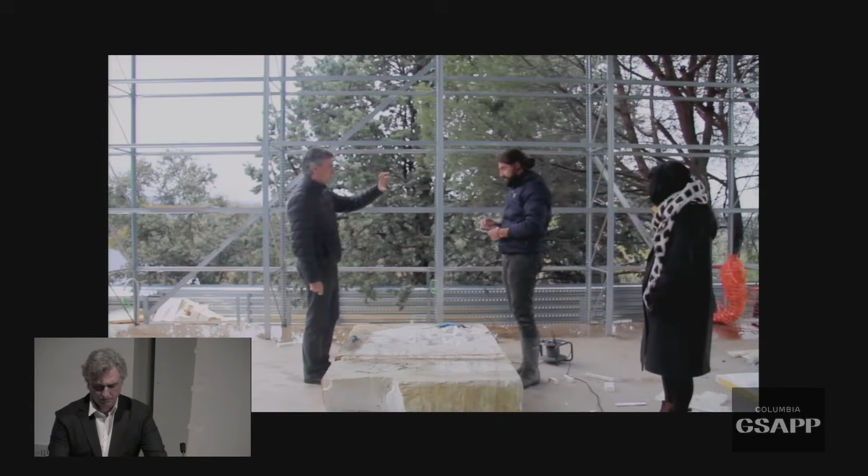So again, the model, the mock-up, the first workshop. This is a model that requires foundation, because it weighs like 300 pounds, the craft of that mountain in the ground, as the first tabula that we are going to cast.

With this model we are jumping scale, developing the choreography of how this would be built, and already embedding a lot of engineering thought and precision into the different actions that would then happen on site.

This is actually our way of training, of getting fit when developing a process we're not familiar with. Now that we're engineering this, the challenge is where to locate the hydraulic pistons, how we balance the wind loads with that action of levitation we're so interested in.

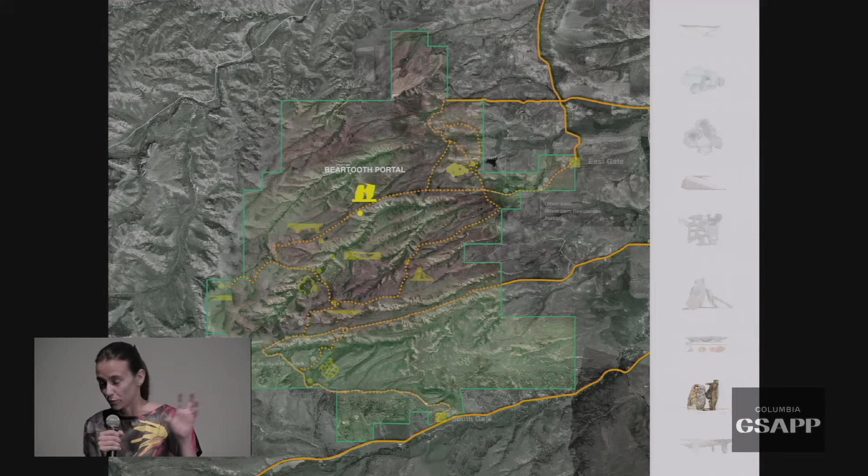So when we showed this master plan, this map of possibilities for the ranch, the clients selected three pieces, which are the ones that we have built and that you can see if you visit Tippett Rise.

And they selected two portals, two symbolic accesses into the landscape, each located in one of the two ways of access and circulation of the ranch. And the other one is Domo, a place for music performances to happen. It's also a smaller acoustic shell.

What we wanted to do with these doors was to create the access to the unlimited, vast, and complete immensity of the place.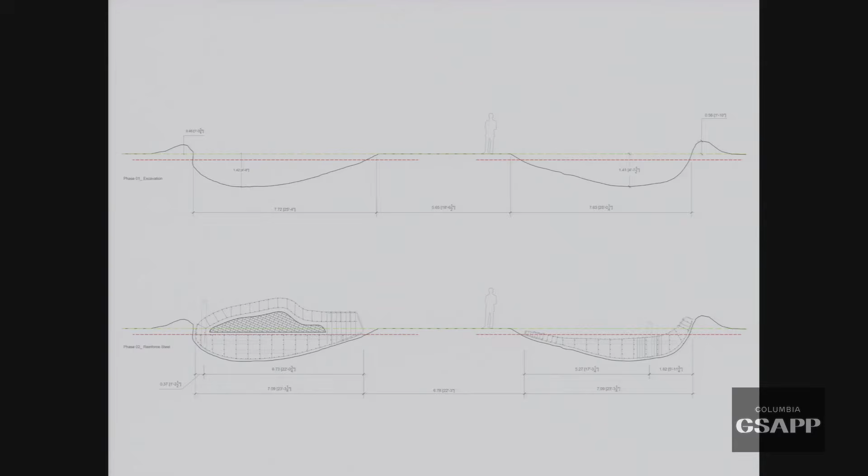So we wanted to recreate, with this action of lifting these two masses of 100 tons, the entry to that place that had to connect architectonically and programmatically the landscape with

the center. So all the effort was to bring all the first craft of molding the stones into very precise engineering. This precision was absolutely required for the rigging and lifting of these structures, and to complete the constructive

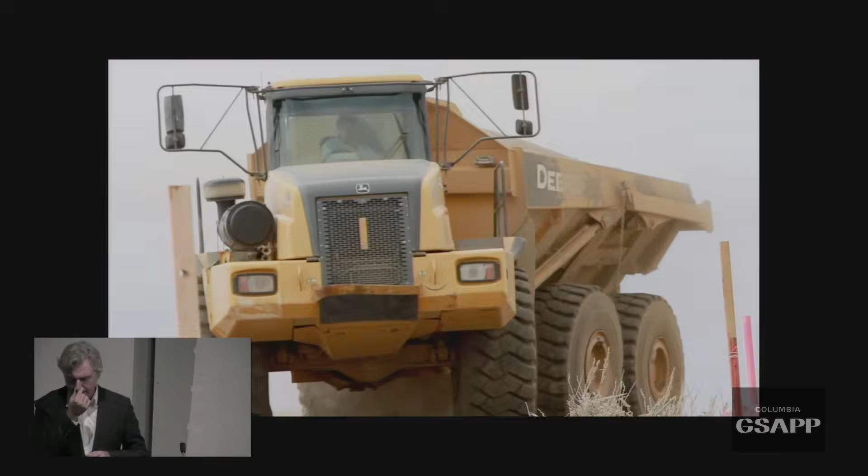process. This process that we're trying to express here started with a very, very intense mapping of the place to choose, in an unreferenced and scale-less way, the position of these entries.

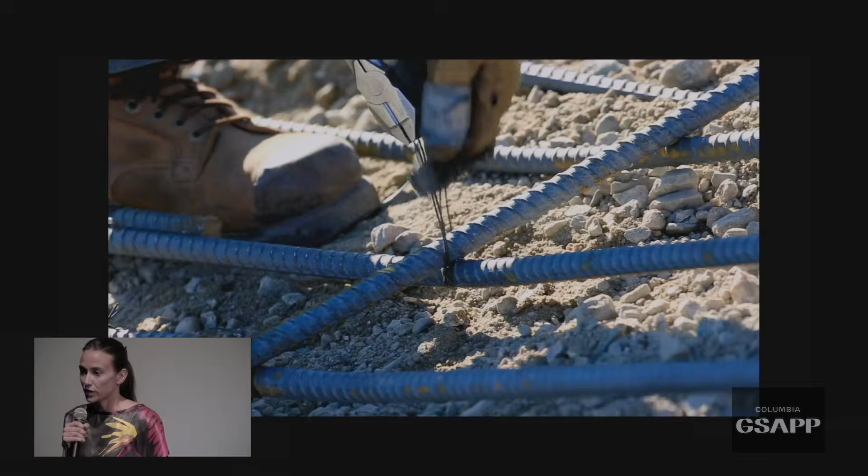And then translating these processes that we were designing with the models, we are now on the site working with the real people, the real men, typically here, who are going to do all the reinforcement, who are going to control the excavator, and we have to have the flexibility to adapt and change sometimes, to improvise.

So when working in these kinds of conditions, where there are parameters you cannot control until you are there, you have to embed that flexibility, that possibility of options, into the design.

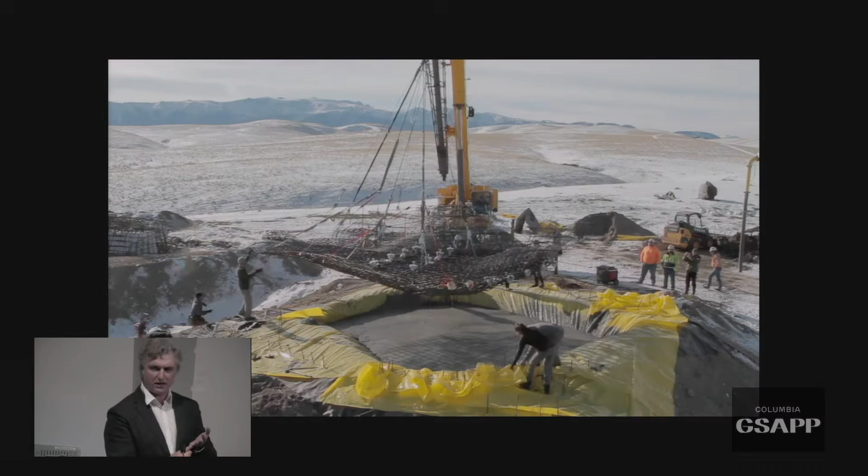About how we build this, this is what we would call a very bad job in concrete, okay? It's basically breaking all the rules of how to do a concrete structure. Not mixing correctly, getting concrete from different plants, throwing the pigments in after, having a non-rigid mold, contaminating the concrete by mixing it with earth and stones. It was the full decalogue of what not to do. We actually did it.

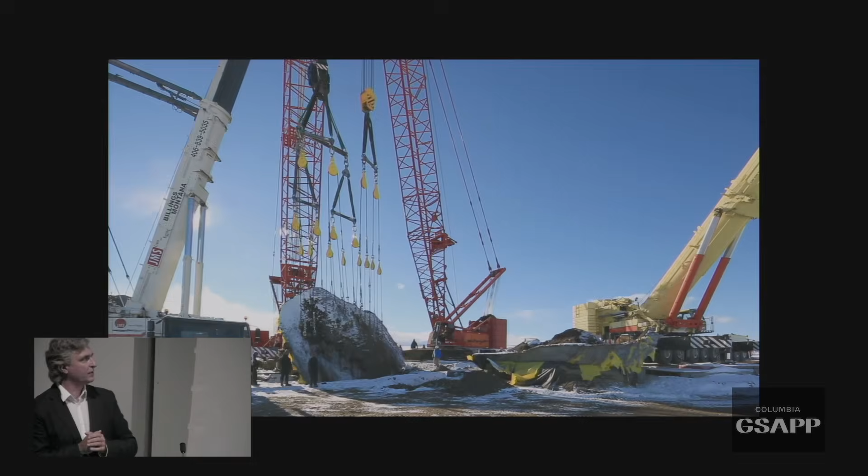And after, how to lift this was also a beautiful, heroic challenge. All these cranes had to rig and perfectly balance the moment of gravity, the moment of touch of these stones. This was the celebration of the presence of gravity, one of the main important aspects of this architecture.

But of course, having built them in this position would have been much more difficult and would have required a lot of other auxiliary tools and structures.

And like in the Truffle, as an extension, we used the concrete as a conglomerate of all the different substances and matters of the surrounding, giving the extreme differences. For example, the internal part versus the external that is casted within the plastic, almost a crystallized version of the concrete versus the very rough interior.

I think this dichotomy, this completely different condition of matter, is what reacts in the equilibrium of these two stones. The inverted portal is the other side of the entry, so we used the same ideas, but putting the smooth part of the structure in the interior and the rough in the exterior.

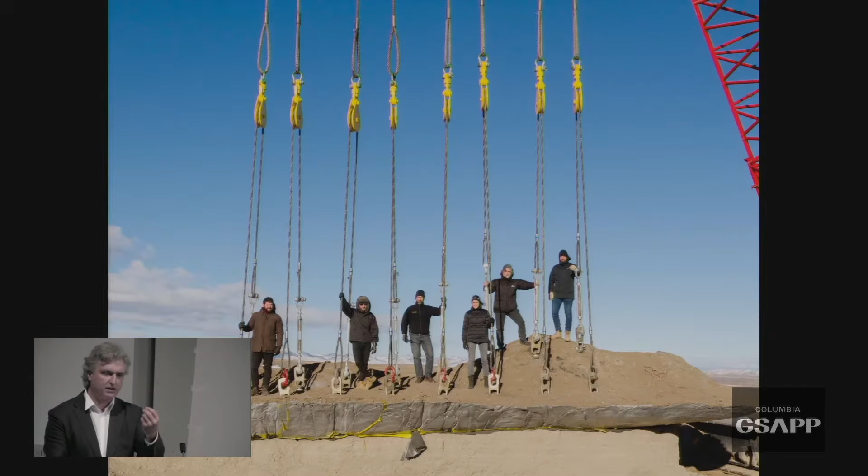And therefore, we discovered how completely different was its presence in the landscape. The first one refers to the canyon and it's rough in its interior, and the second one refers to the mountains and allows nature to expand in the exterior rough space, where the seeds get trapped and where the snow also gets trapped.

And after these two entries, we have the first room, the Domo. It's a room for chamber music, for solos, for duettos. We wanted this Domo to be kind of the primitive first structure - the dome, the domus, the cavern.

So we provided this acoustical condition to the wrinkles of the dome, and a mechanical position of these three big legs that celebrated the hills and emulated the hills as a space of gathering.

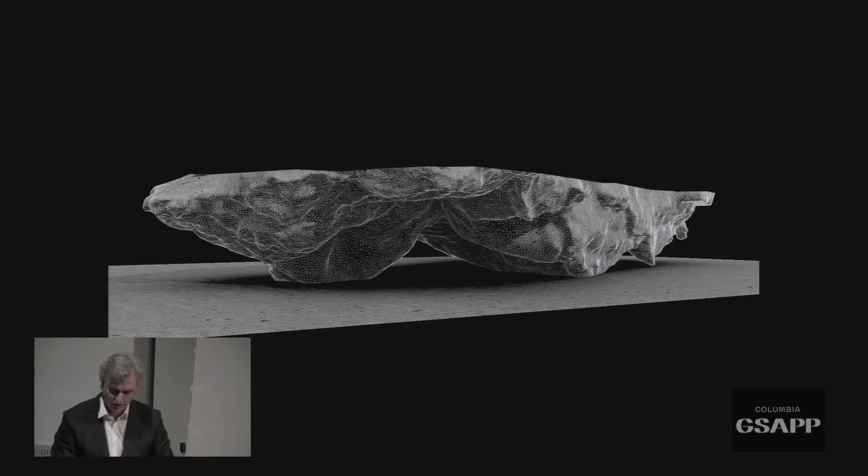As you can see, the plans are almost like topographies that we casted on a compacted gravel bed, and we unearthed it as a discovery, almost as an archaeology, that gave us almost a treasure that we didn't know, by the way, how the result would be.

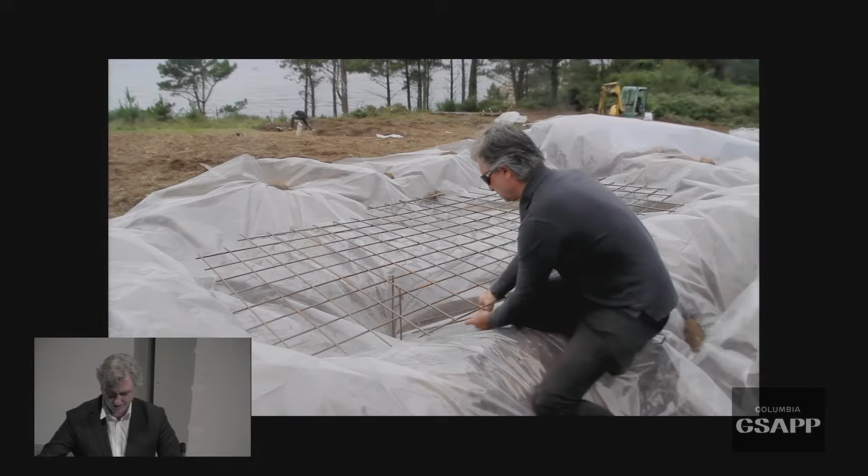And the models, again, we honor the models, and we make the models always a big event, sometimes a family event, as you can see here. These models do guide our practice, have always guided the practice since the beginning, and also test part of the performance and the spaces that we are creating.

So here we were trying to figure out all the construction process, but also we were trying to come up with the textures that would provide the best reflectivity for sound to move, and the mixture between the concrete and the ground that you will see again performed on the land.

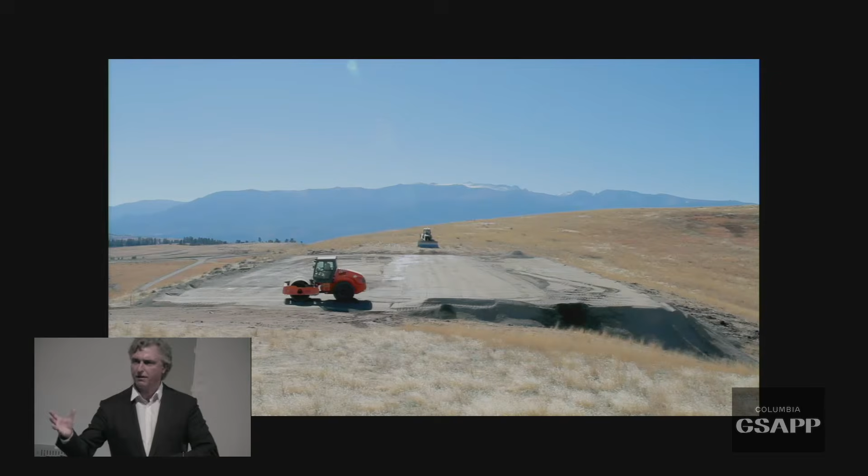So in this project, what we did was, first of all, create the topography. We didn't want to harm the existing layer of grass, so we borrowed part of the gravels that construct the compacted roads of the ranch, and gave it back later on. So this bed of almost 20 feet of gravel, this prefabbed mountain, was the mold that we were going to use to cast.

The cast took 24 hours, and all the previous work took 6 months. So this is the time frame between carving, molding, reinforcing, and casting.

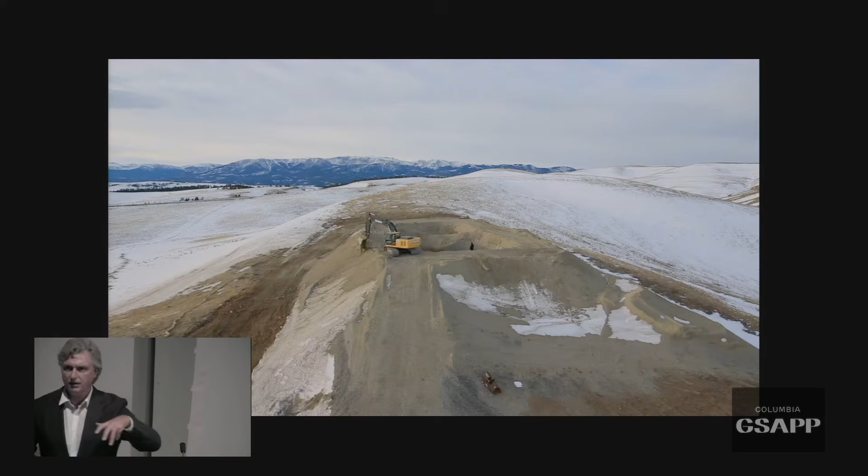It was a fantastic experience, to operate and to draw with the excavator, to wrinkle all that space, to create all the surfaces that we were anticipating we wanted to be the last print.

One of the most difficult parts of this project was to figure out what was the right scale for the landscape, because it's something that was almost impossible to measure, and that we actually could not.

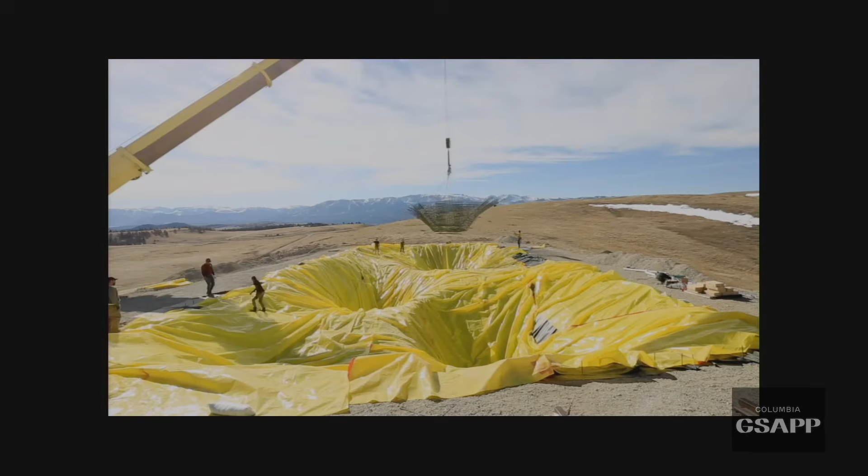As you can see, this is not a standard construction. This is something that we did among us, with people from Ensemble Studio, local people, a contractor, the ranch manager. This was kind of a bigger scale performance, but of course none of us knew what we were doing. And I think this was part of the excitement.

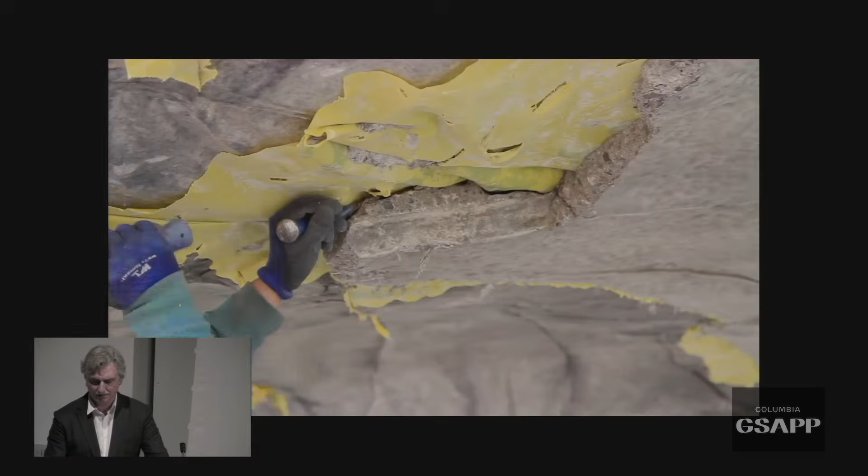And this moment was magical. We were removing all that soil and discovering, like an archaeological ruin, what had happened. And after, like in a very micro scale, hammering smoothly to remove all those plastics, the different layers that had been casted among them, and we discovered happily that...

the mountain had been, the hills had been created, and that all these aged, almost transformation of the concrete as a soulless material into something that had an enormous vitality, an enormous beauty. It looked like almost Carrara marble, because it had all those wrinkles and all those different prints and tints of the process. This process of doing things straightly wrong.

I think they succeed in mediating between the scale of the landscape and the scale of the visitor, of the human. And actually, when you are close to these structures, you feel more protected. You feel sheltered by these masses in what is a very harsh environment of huge winds, big heat, or big snow.